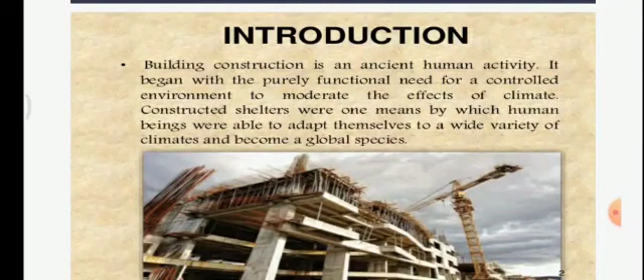Introduction. Building construction is an ancient human activity. It began with the purely functional need for a controlled environment to moderate the effect of climate. Constructed shelter was one means by which human beings were able to adapt themselves to a wide variety of climates and become a global species. Now, the history of civil construction began in the period of primitive humans, for protection against cold, rain, heat, etc. They made a cave as their shelter.

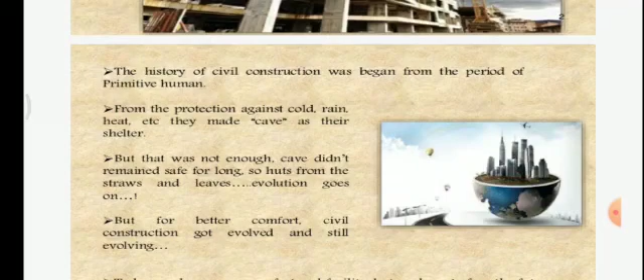But that was not enough. Caves did not remain safe for long. So huts from straw and leaves came, and the evolution goes on. For better comfort, civil construction got evolved and is still evolving.

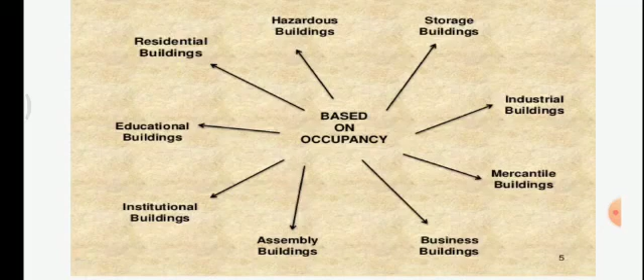Now, next slide. Types of building. Types of building are based on occupancy, such as storage building, industrial building, mercantile building, business building, assembly building, institutional building, educational building, residential building, and hazardous building. Now, residential buildings are those in which sleeping arrangements are provided with or without cooking arrangements. It includes single or multi-family dwellings, apartments, lodging, restaurants, hostels, dormitories, and hotels.

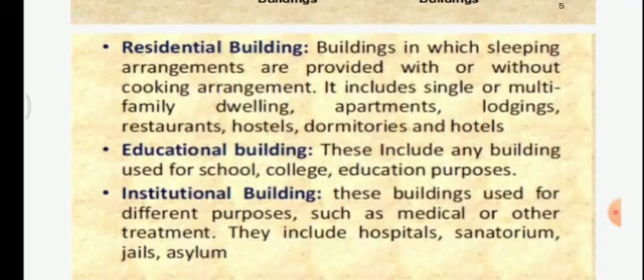Educational buildings include any building used for school, college, or education purposes. Next one, institutional buildings. These buildings are used for different purposes such as medical or other treatment. They include hospitals, sanatoriums, jails, etc. Assembly buildings. These are buildings where groups of people meet or gather for amusement, social, religious, political, civil, travel, and similar purposes. Examples are theaters, motion picture houses, assembly halls, restaurants, etc.

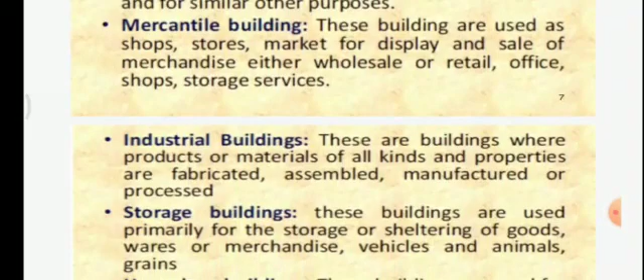Now, business buildings. These buildings are used for transactions of business, for keeping accounts, and for similar other purposes. Next one, mercantile buildings. These buildings are used as shops, stores, and markets for display and sale of merchandise, either wholesale or retail. Industrial buildings. These are buildings where products or materials of all kinds are fabricated, assembled, manufactured, or processed.

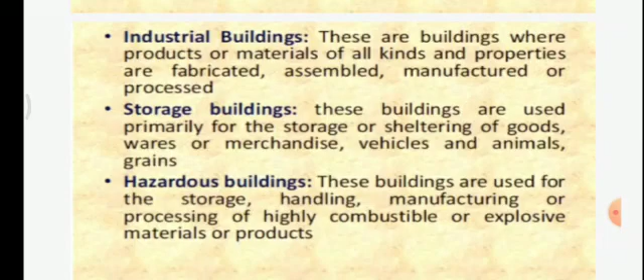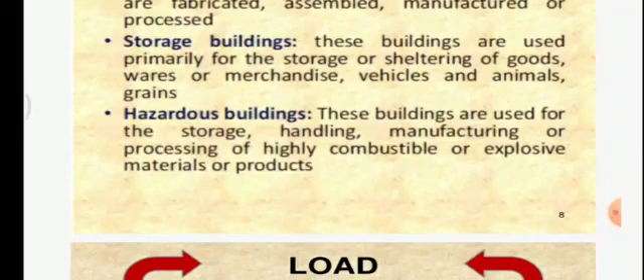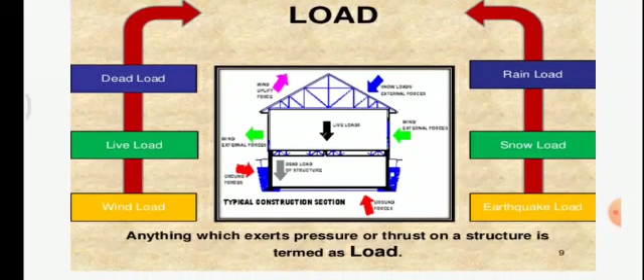Storage buildings. These buildings are used primarily for the storage or sheltering of goods, wares or merchandise, vehicles, and animals, grains. Last one is hazardous buildings. These buildings are used for the storage, handling, manufacturing, or processing of highly combustible or explosive materials or products. Now, load. This is a diagram of typical construction section of a building. Basically, there are six types of load shown in the slide: dead load, live load, wind load, rain load, snow load, and earthquake load.

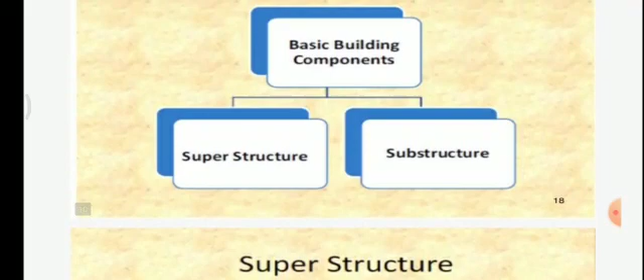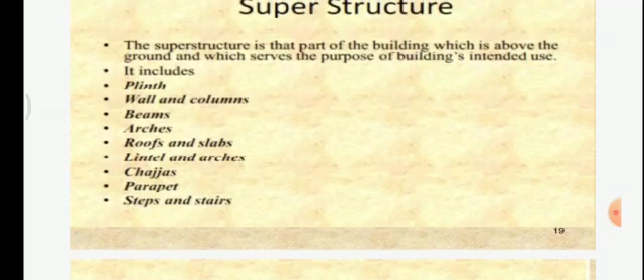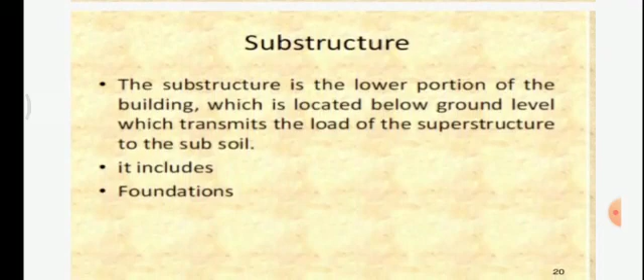Common building components: basically there are two types of structure, superstructure and substructure. Superstructure is the part of the building which is above the ground and which serves the purpose of the building's intended use, like plinth, walls and columns, beams, arches, roofs and slabs, lintels and arches, chajjas, parapets, steps and stairs. Now, substructure is the lower portion of the building which is located below the ground level, which transmits the load of the superstructure to the subsoil, like foundations.

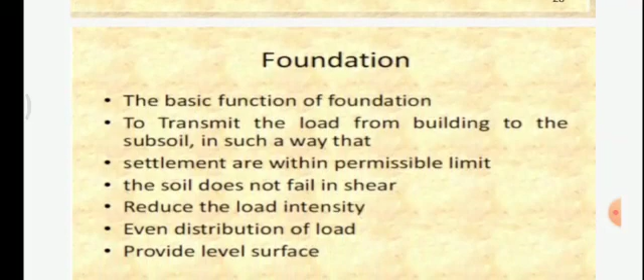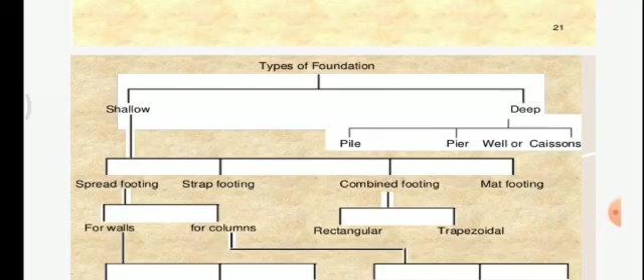Spread footing. Spread footings are basically for walls and for columns. Combined footings are rectangular and trapezoidal. For walls: simple, stepped, and grillage. For columns: single, stepped, and sloped.